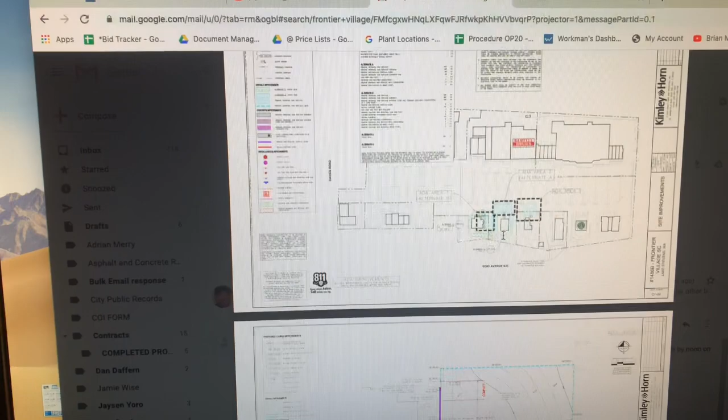Okay, we're looking at a job called Frontier Village Shopping Center, and it's some ADA upgrades on this project. I did a video earlier that was on site showing the locations and what it looks like outside.

Now I'm going to go through the drawings with you. You've got Area 1, Area 2, and Area 3. Area 1 is basically the base bid. Area 2 is called alternate A, and area 3 is called alternate B. So you're gonna have to do separate spreadsheets on this, starting with area 1.

So area 1 is right here. It's a small little company, I can't remember the name of it. It's on the first video.

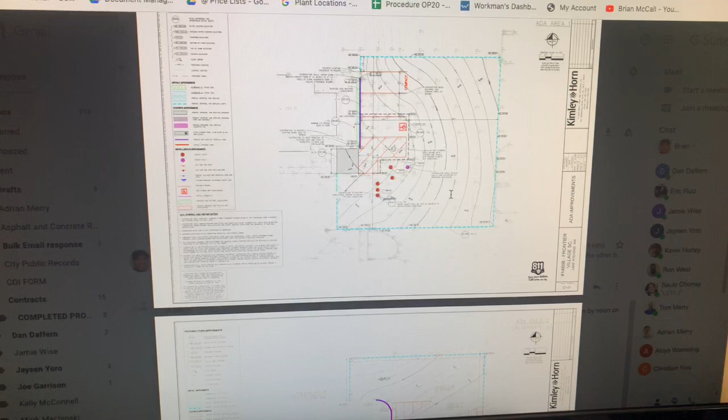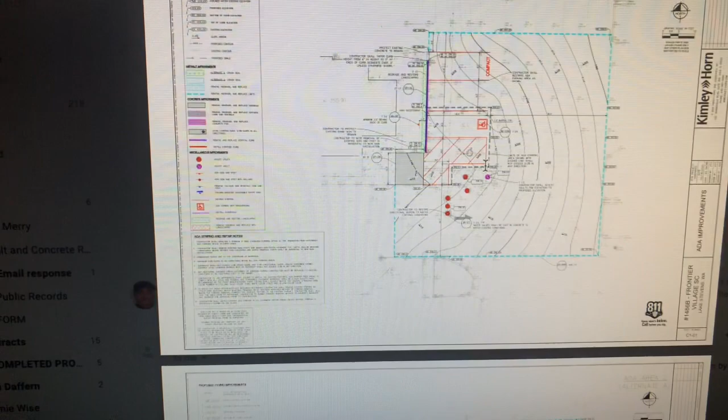What we need to do is remove all this asphalt in this area, and then recreate that area in asphalt. We need to make it ADA compliant, 2% by 2%. We're going to replace that vertical curb, replace that concrete sidewalk, and do some striping. In these little areas where the dots are, the purplish colored one is a vault that we need to adjust when we put the asphalt back in. And then the 5 red things are 6-inch water valves that we just have to put a concrete collar around them, so they're protected by concrete instead of asphalt.

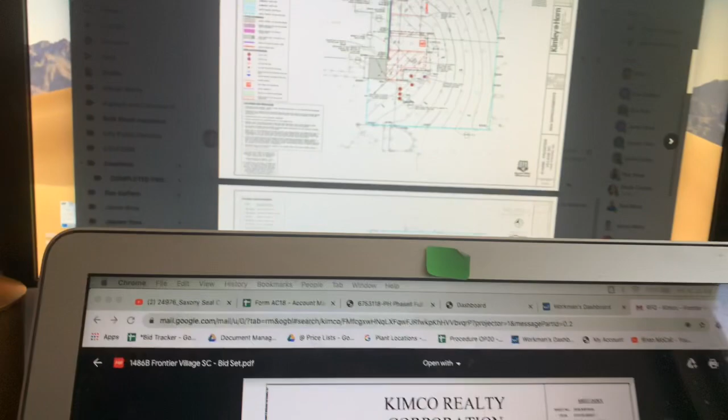Okay, I'm gonna try to blow this up so you can see what I'm talking about a little bit better. There was core samples done out on this property, and around in this area I believe it was 8 inches of asphalt. So I want to propose the asphalt removal and placement at 8 inches. This is in the blue area.

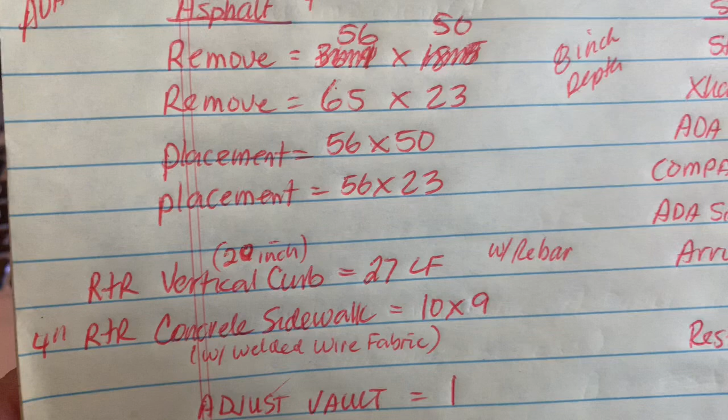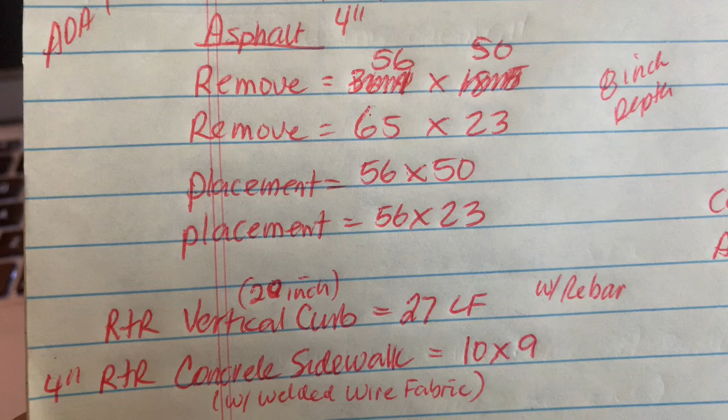So that asphalt removal, I said 4 inches, but that's incorrect, it's 8 inches. We got 56 by 50 and 65 by 23 as our removal. Placement is 56 by 50 and then 56 by 23, so it's a little bit smaller because of the concrete we're putting in.

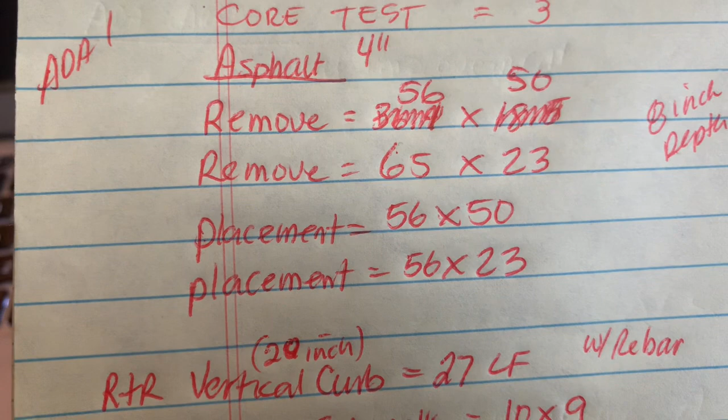Okay, let me see what else. Okay, so that's it on the asphalt.

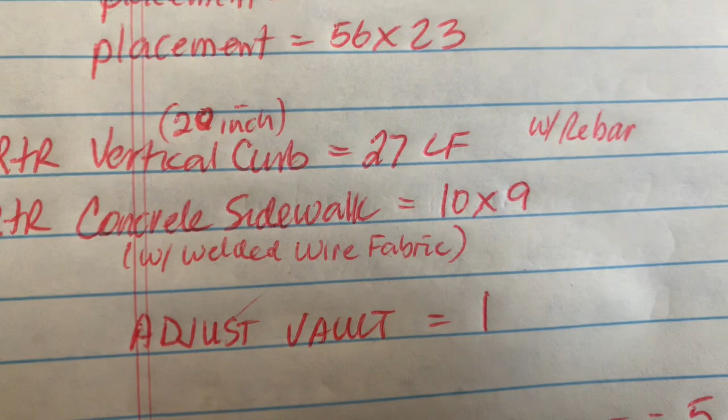Now we're looking at the concrete, which is right here, the concrete pad. That concrete pad's gonna have to be broom finish, it's 4 inches, and we are looking at a 10 by 9. They want welded wire fabric in it.

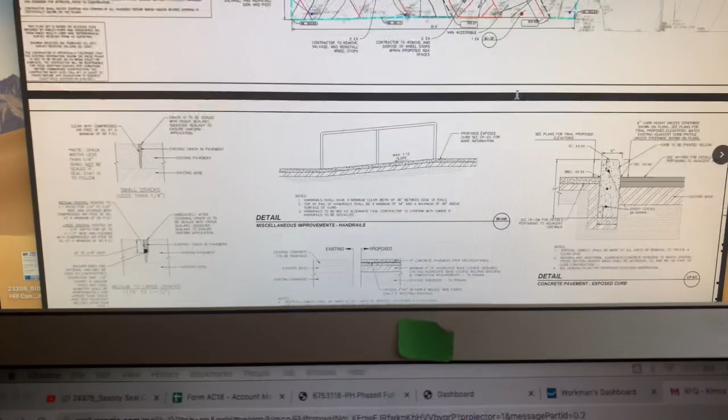Then there's vertical curb, 20-inch vertical curb, 27 feet. That's this purple area, and the detail is in here. Which one is it? It's not that one. It is that one, okay, 20 inches. I don't know what page it's on, but it's in the details. Also on that vertical curb, it's saying we need to put in epoxy coated number 4 rebar throughout the length of that. So we got to have 2 number 4 rebar sticks that are 27 foot each to place inside that vertical curb.

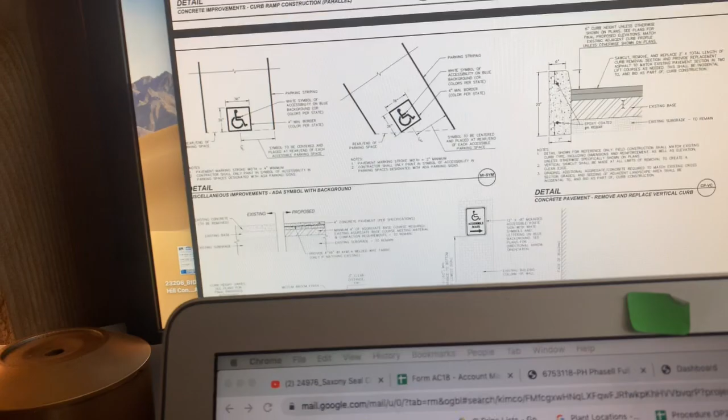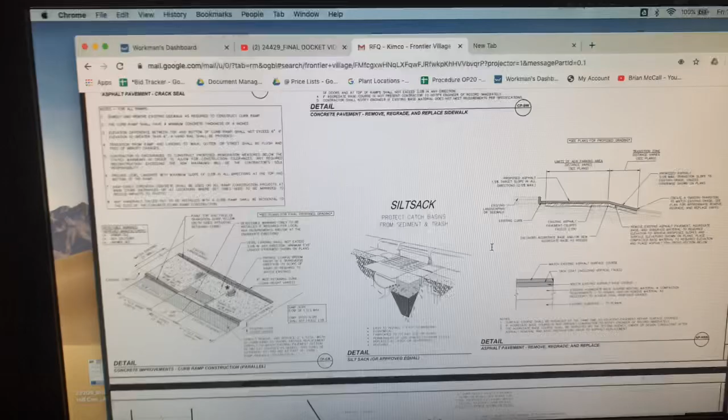Going back to the asphalt, it says we don't have to bring in any extra material. I believe it says existing asphalt pavement slopes exceed that, so there's nothing on the asphalt we need to add in there. But on the concrete, we need to add base to the concrete. So on that sidewalk, we've got 4 inches of concrete, but then we also have 4 inches of aggregate base course underneath. So we're gonna need 4 inches of rock in there and 4 inches of concrete.

Okay, so going back to that pad there on that 10 by 9, we need to assume 4-inch removal of concrete and then 4-inch removal of dirt.

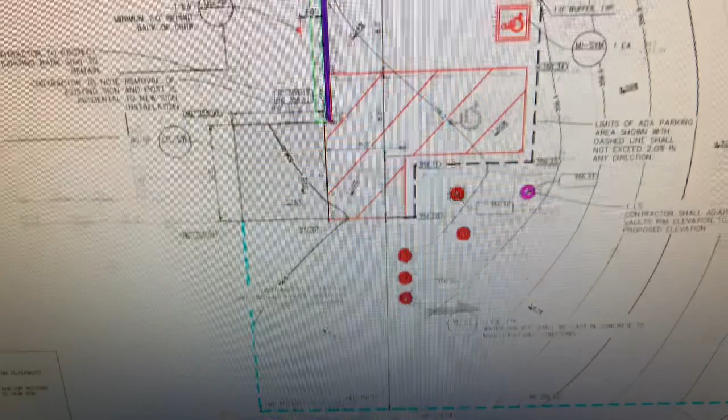Okay, we talked about those valves already. We've got 1 vault lid that needs to be adjusted when we put the asphalt back in. And then we have 5 6-inch water meter valves that need to be cast in concrete around them. They probably could be square if we wanted to make them square, but they want them cast in concrete so that way they're protected.

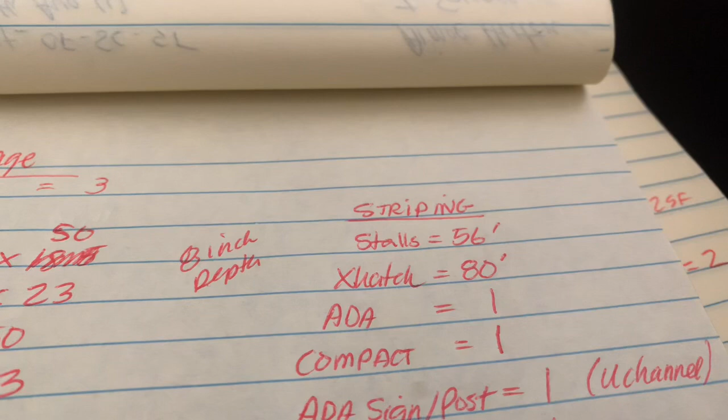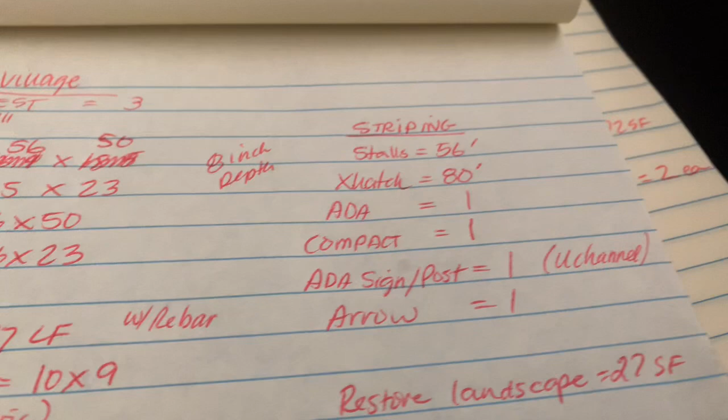Okay, let's go to the striping. There's 56 feet of stall line, 80 feet of crosshatch, one ADA symbol, one 8-inch compact, one ADA sign and post on a U-channel post. So if you plug in the Telespar posts, you'd probably be okay for pricing. And then they want a painted arrow to be put back in.

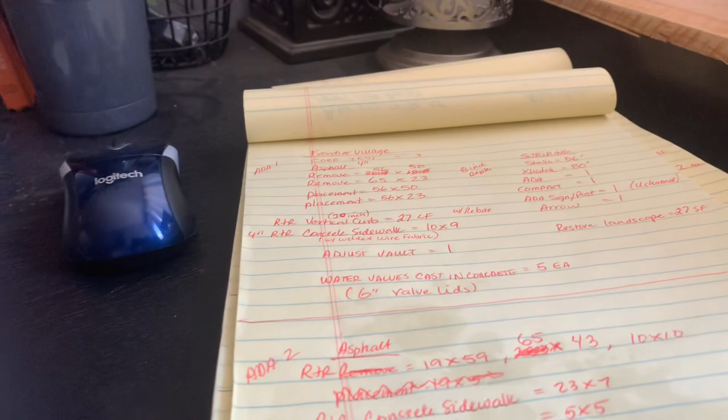Let's see. I think that's everything on this. The first video shows where there's staging available out here. We'll have to close this area down, so we're going to want to make sure that we've got cones and caution tape so that we can block off this area. People will be able to drive around us, but we need to block it off so that way we have access to all that area, that work zone.

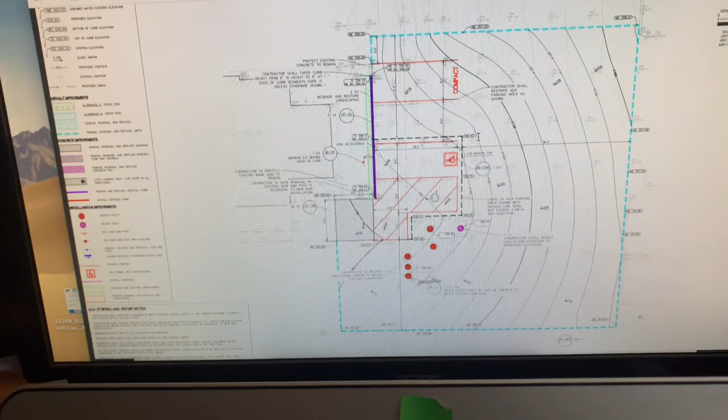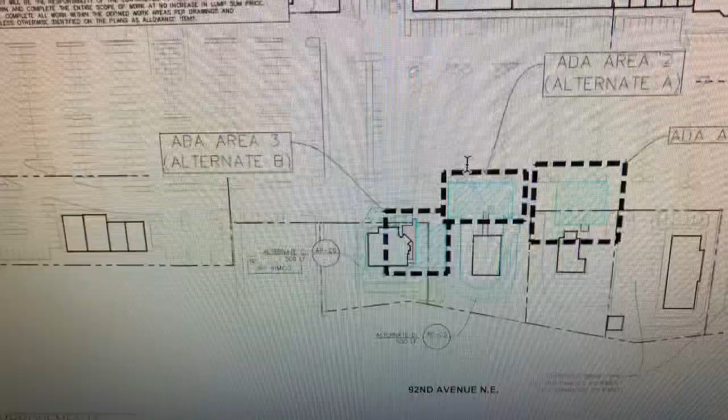And then there's actual parking back here behind the building that we can use too while we're there. All right, so that is area number 1. Let's go to area number 2. Area number 2, if you're looking at this map, you've got right here, and I believe that's Heritage Bank. It has a little drive-through that goes to the back, and then it has ADA upgrades in the front. That area in the back is going to be a bid option, and that is for crack fill. They've got 500 lineal feet of crack fill as a bid option for area number 2.

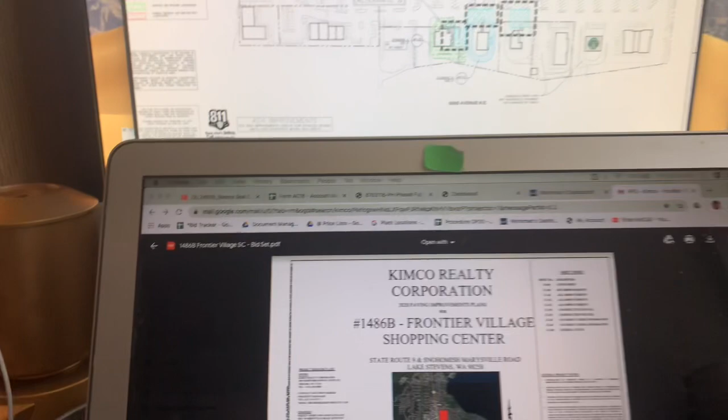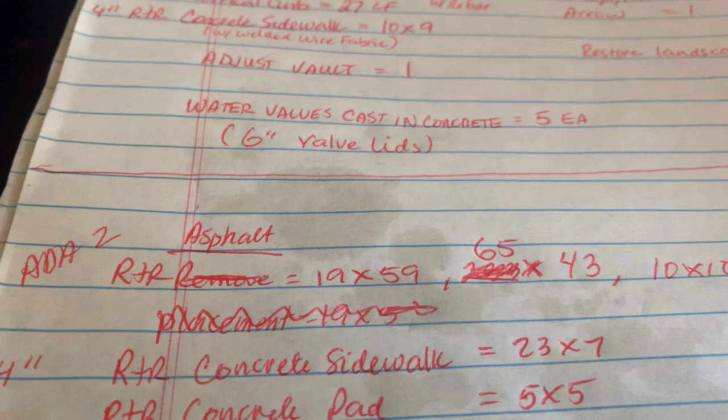Okay. Let's look at how this thing lays out here. So, hold on here. Okay, the blue highlighted area is everything out in the front. We need to remove that asphalt, replace it. We're going to use 8 inches again. And the dimensions on that for the R&R is 19 by 59, 65 by 43, and 10 by 10. I noticed on the drawings they have plugged in square yards, so we can kind of compare my notes with the square yards if we want.

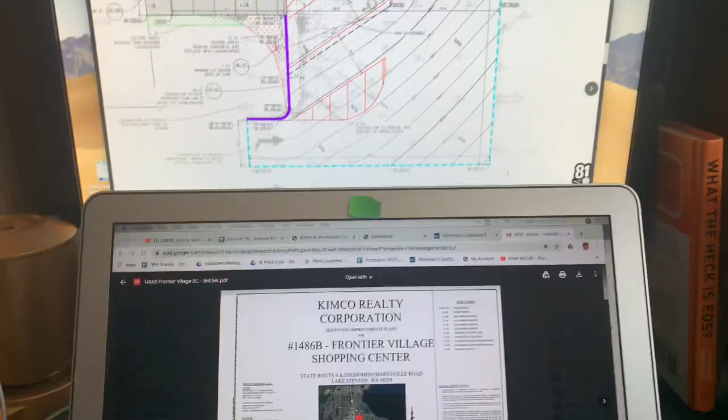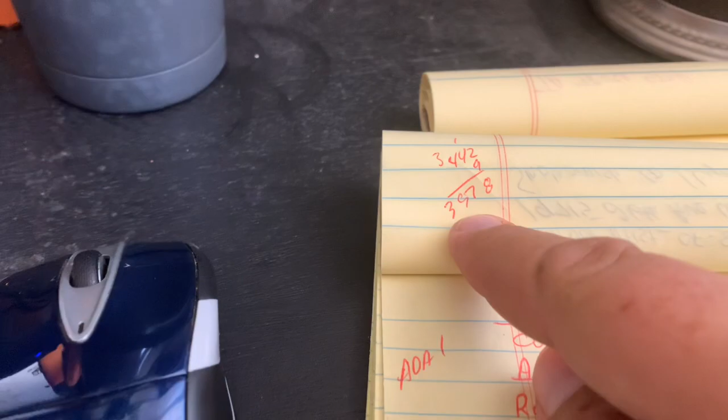Let me see here. Okay, so I gave you my dimensions on area 2 for remove and replacement. They're saying it's 442 square yards, which equals out to 3,978 square feet. So we could compare their footage with what I came up with. Okay, so that's the asphalt portion of it.

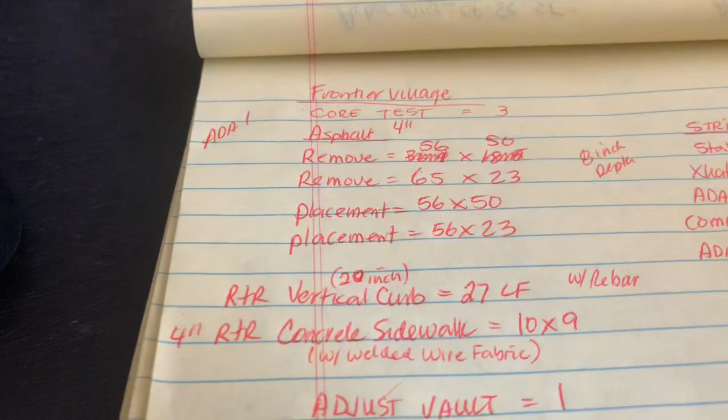Now let's talk about this vertical curb that's in here. That vertical curb, which is 20 inches tall, that is 27 feet long. Oh, I'm sorry, wrong one. The vertical curb is 52 feet long. Okay, 52 feet. That means we have to have the number 4 rebar running horizontally in this curbing. We need 2 sets of rebar running through there. So that's 104 feet of number 4 rebar, epoxy coated.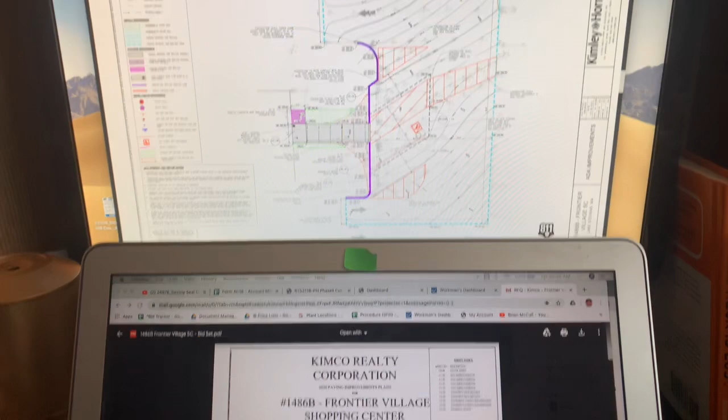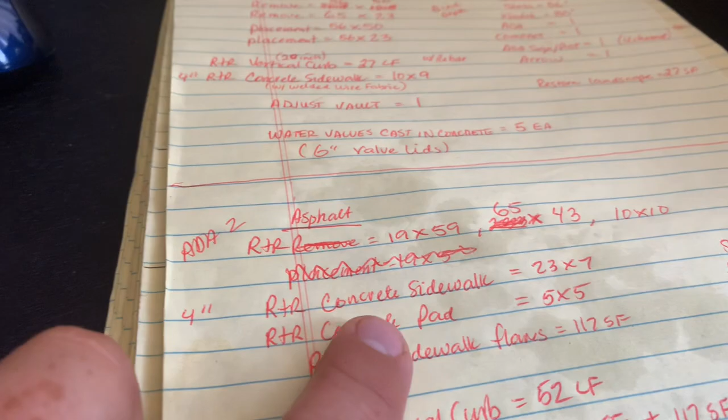Okay, restore the landscaping. There's 100 square feet plus 117 square feet. That's this area in green, and then this area in red. Okay, we'll get back to that. Remove and replace concrete sidewalk, 23 by 7, 4-inch depth. They want that welded fabric inside of it, broom finish. Okay, 23 by 7. Then there's a concrete pad that's right here and right here. Both are also 4 inches.

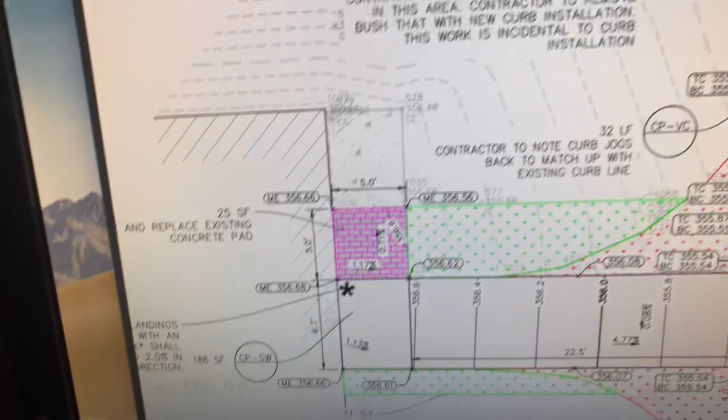Okay. So you've got, hold on. So this is a 7 by 5 here. And then in this area right there, that is a 5 by 5 concrete pad. Okay, you see 25 square feet. All right. So that concrete pad though, we don't have to put the mesh in, I don't believe. We just need it for the other stuff. But you know what? Why don't you just plug it in there? Let's plug in the wire mesh for all of it. So the welded wire fabric for all this concrete through here.

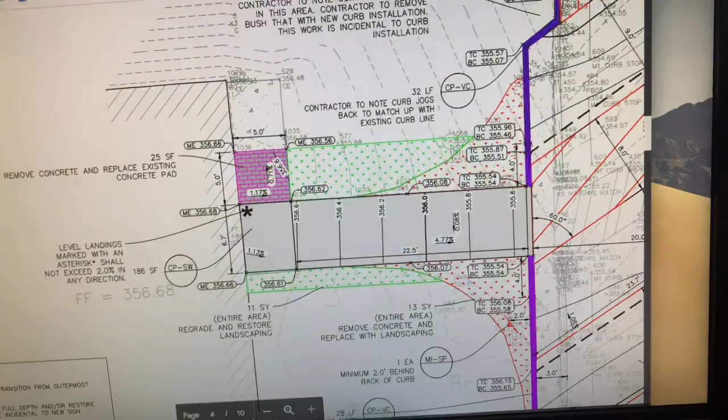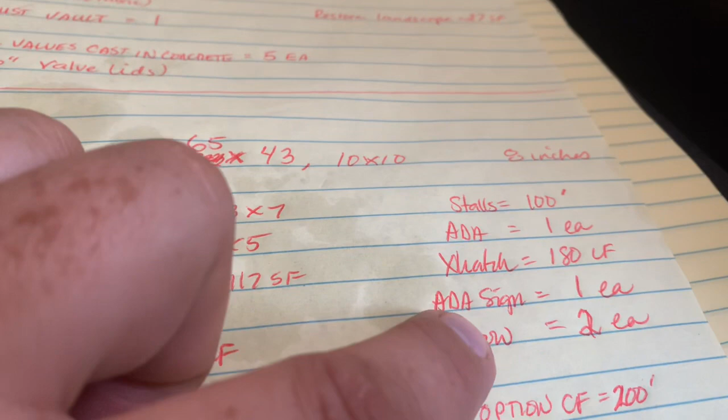Okay, then there's removal of concrete, which is right in here, in this area. That area right there is removal only. That's 117 square feet in that area. Okay, so 117 square feet of concrete removal, 4 inches. All right. Last thing to discuss is the striping and the ADA sign. So we've got 2 arrows, one here, one down here. We've got 100 feet of stall line, 1 ADA, 180 feet of crosshatch, 1 ADA sign and post. That's going to go in the landscaping, and use the Telespar post for pricing.

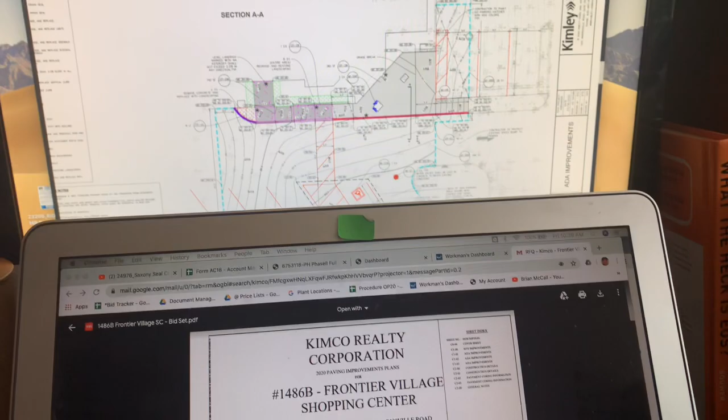I already talked about the arrows, and actually don't look at that crack fill. I said 200 there, but the bid option for the crack fill was 500 feet. Okay, so I think that covers area 2. Okay, so that's on all separate spreadsheets. Now we're looking at area 3.

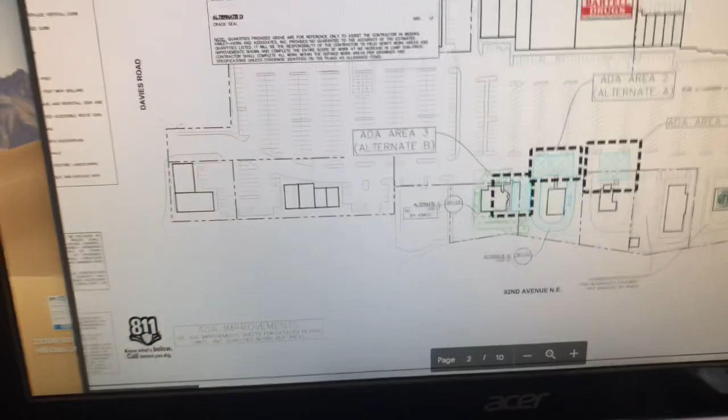So on the map, area 3 is Key Bank. And you can see there's quite a bit of work here. Where that green area is there, it's, I believe, crack fill. Yeah, according to the note legend in green, that's crack seal. So down here, we've got a bid option for 500 feet of crack fill in that area in the green, okay? Now what we're looking at is that blue area for area 3.

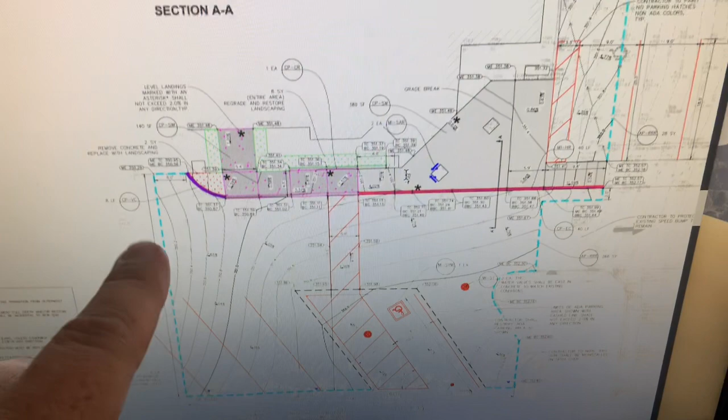Okay, so in this blue area, all of this and all of this along the side, you'll see in my first video, I walked it, but that's all asphalt removal and replacement. This here is not going to be 8 inches. We're going to go with 6 inches on this asphalt here. Okay, so remove and replace that asphalt. We've got 10 by 25 and 61 by 43.

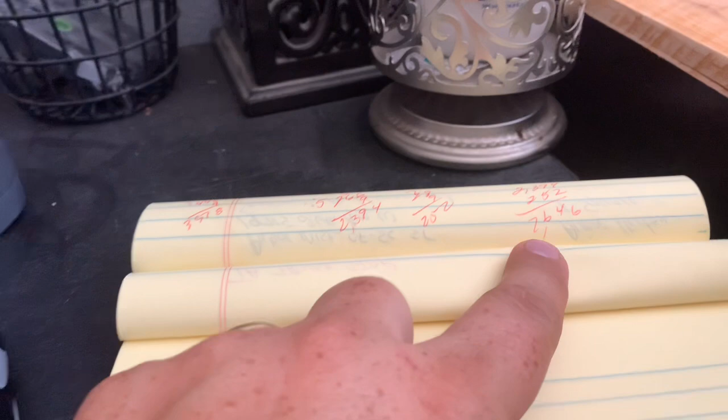If we want to compare notes, okay, so I gave my dimensions on the R&R for the asphalt. If you were to break it down based on what they have on the site plan, it comes out to 2,646 square feet that they have on the drawing. So we'll compare notes, and I want to go with the higher number. I don't want to be short.

Okay, there's two water valves there that we need to cast in place. So we've got to put a concrete collar basically around it to protect the lids. Okay, and I think those can be at 4 inches.

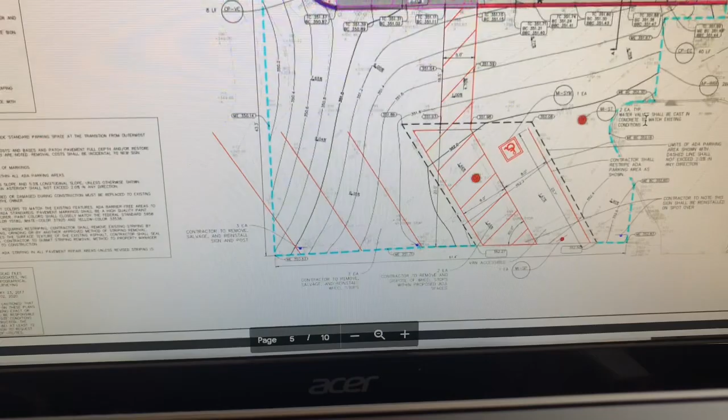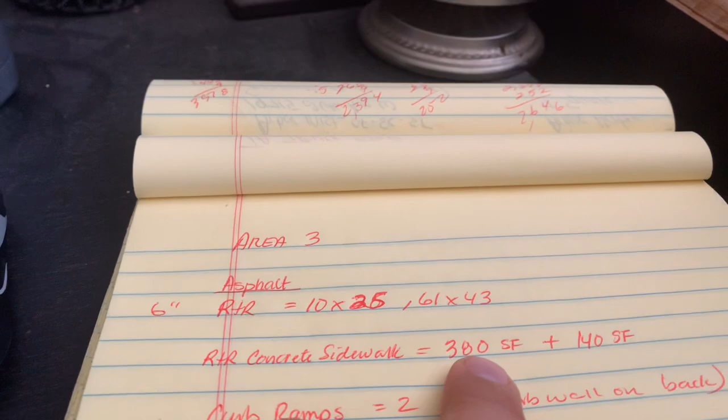We've got concrete sidewalk remove and replace here. 4-inch depth. That's in the gray. Okay. We've got 380 square feet plus 140 square feet. That also includes this purple area right here. Okay. So removing all of that, replacing all of it. You'll see in my first video, this is right up against the building, and it's got a couple posts, got some windows, so we're gonna have to protect those areas.

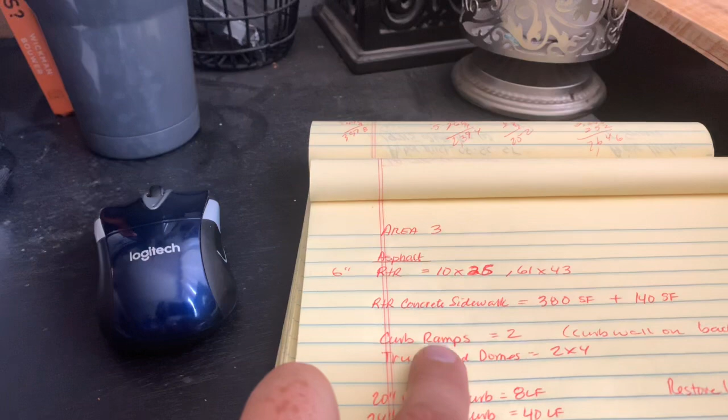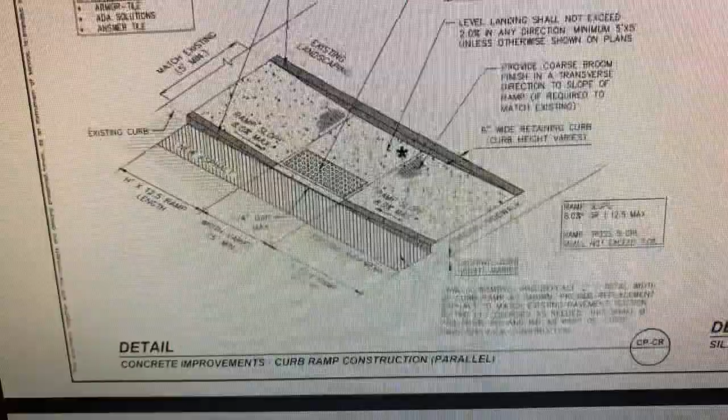Okay, then we're looking at within that sidewalk there's one area where we're gonna have an ADA ramp going in 2 different directions with a truncated dome. That's gonna be right about here in this area. There'll be a landing here and 2 ramps. This is what it looks like. It'll have curbing on the backside. It'll have the integral curb in the front, and then we'll have the sidewalk. It will be poured separately. It's not monolithic, so just giving you a heads up on that.

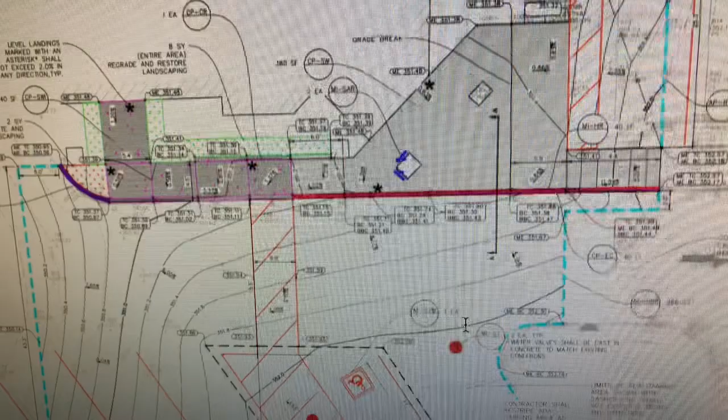Okay, now looking at that reddish purple line, that is curbing, but this is a little thicker curbing. The last stuff I showed you was 20-inch vertical curb. This is 24-inch vertical curb, and there's 40 feet of it. On this detail, it shows that there are 3 sets of rebar in it, epoxy coated number 4 rebar. So there's 3 sets of that. So you've got to go 3 of those times 40 feet. So we've got 120 feet of number 4 epoxy coated rebar for that curb.

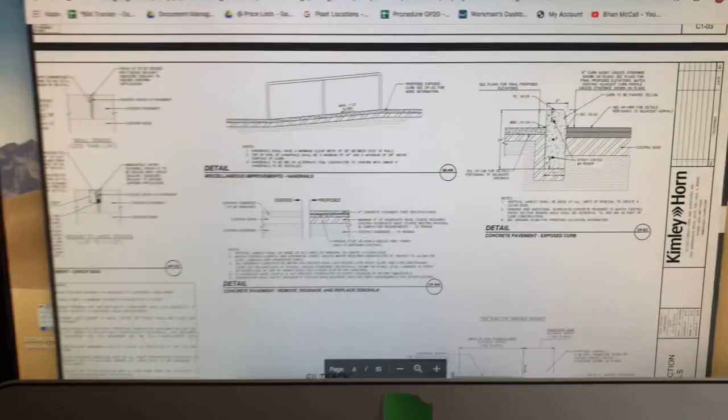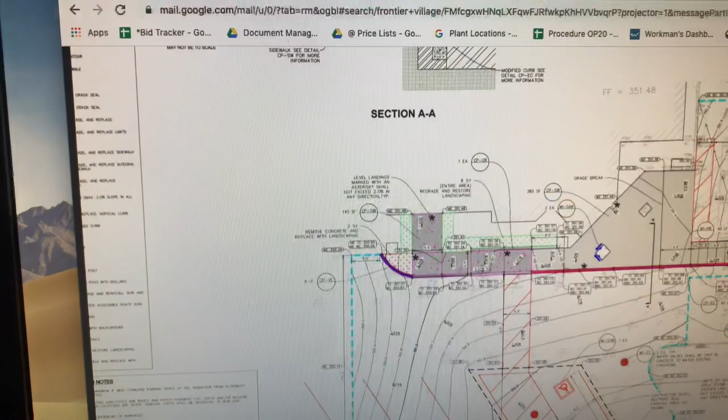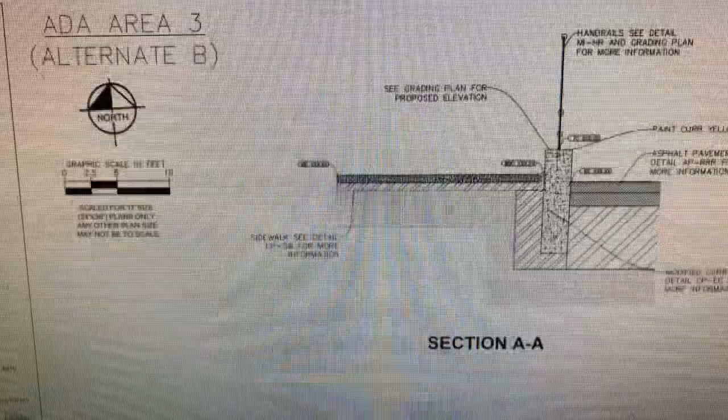And then over here in the purple section, okay, going from basically here to there, we've got 8 lineal feet. Now this area right here, it's going to be a little bit different, but I'll show you the footage here in just a second. So this is what it's looking like here on this curbing. It's basically the 24-inch curb, but it has to be painted yellow because that's where the ramp's going to be. So it's going to have 6 inches exposed on the asphalt side, and then it's going to be a little bit less on the sidewalk side.

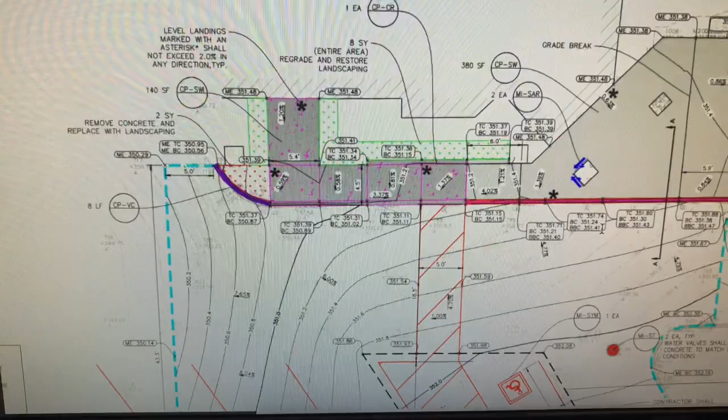So let's just add more 24-inch curbing, and it's gonna go 5 foot plus 5 foot, and then you've got an additional 5 foot, so 15. It's about 22 feet additional there. Okay, so on the 24-inch vertical curb, we now have a total of 62 feet of 24-inch vertical curb, and then we've got that little 8-foot section of 20-inch vertical curb.

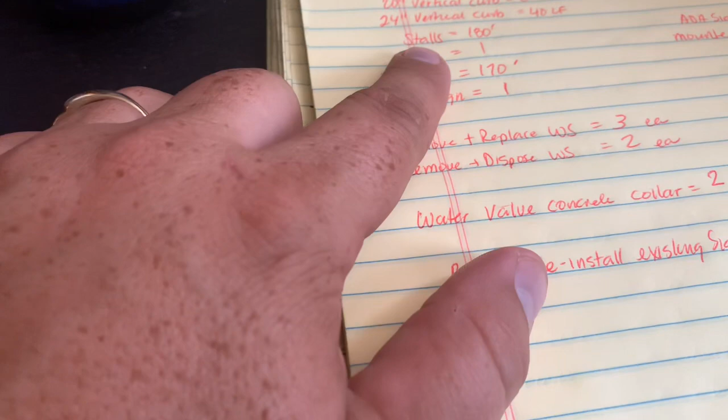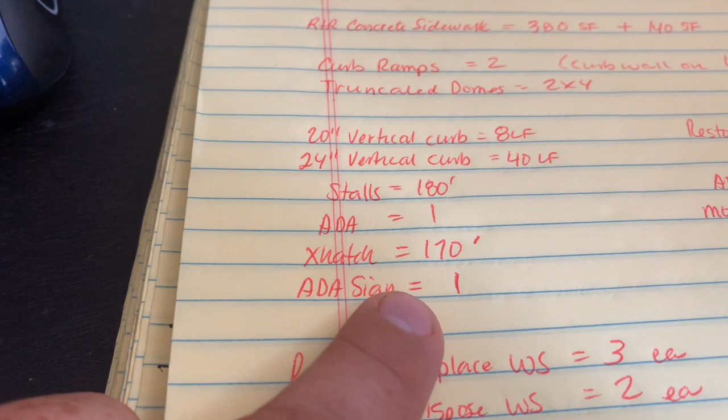All right, let's talk about the striping. 180 feet of stall striping, one ADA symbol, 170 feet of crosshatch, one ADA sign on a post, but it's going to be put in asphalt, so we're going to want to put like a sleeve or something in the ground when we go to do the asphalt, or we're going to have to puncture through the asphalt and put that sign through.

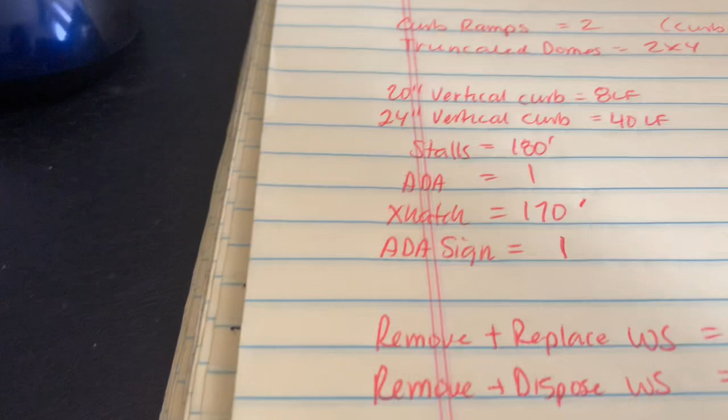Remove and replace wheel stops. There's 3 of them, and those 3 are going to be down here. We'll remove it when we go to do the asphalt work, and then we're going to salvage those wheel stops and reinstall them. Then there's 2 wheel stops that are right here that we need to remove those. Okay, we have to remove those.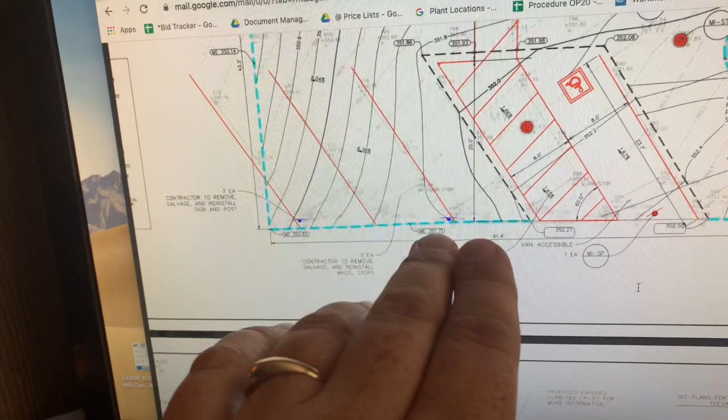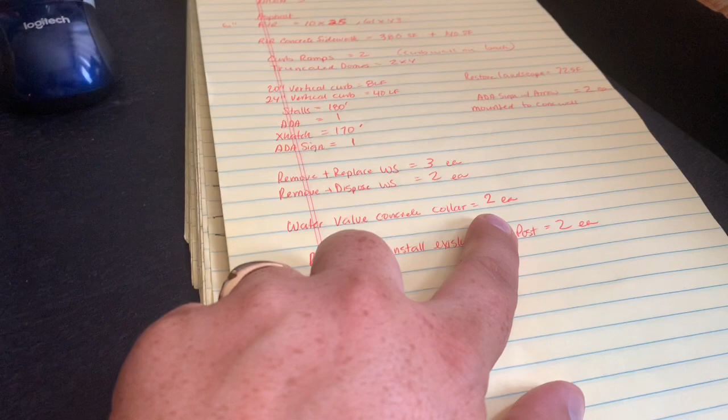There are 2 existing signs and posts here that we need to salvage and reinstall. We talked about the water valves needing the collars. There's 2 of those. Reinstall existing sign and posts. I already talked about that. Restore landscape. There's 72 square feet of landscape to restore.

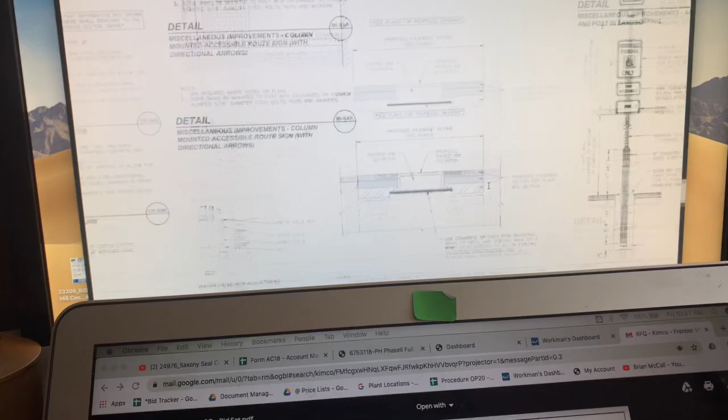And then the last thing is there's 2 ADA signs with arrows that need to be mounted on the concrete wall. And that is right here. So there's a concrete wall there that we need to install those signs onto. And that looks like, I have a picture here. Oh, it's right here. So you can see it's got the ADA sign with a little arrow on it. It's a 12 by 18, and it mounts onto the concrete wall.

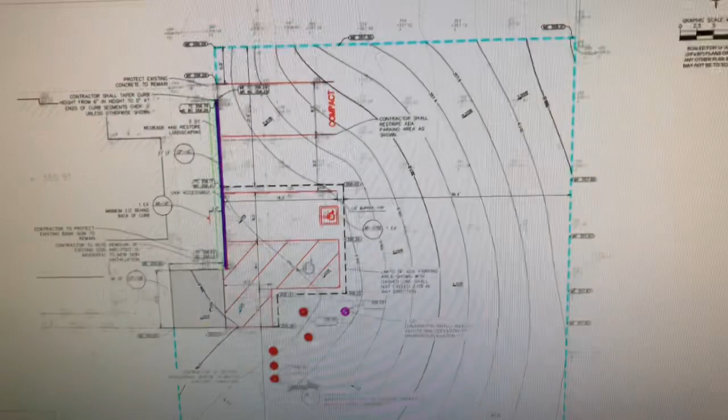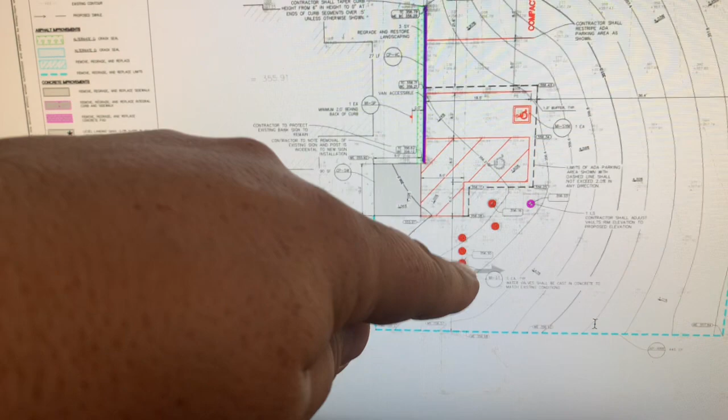So the labor on this, well, with everything on area 1, I'm going to say we're probably looking at 1 day of asphalt. Then we're looking at 1 day of concrete. To do this, we probably can form and pour that vertical curb as well. So I'd probably say day 2 would be concrete. We've also got these little things to pour collars on, a little cast in place around the valves there. I would imagine we can do that as well.

So far I'm up to 2 days, and then probably a 3rd day to go in, do the striping, and put in the signage. Okay, so as I'm looking at it right now, I believe that's going to be 3 days. 3 days on area 1.

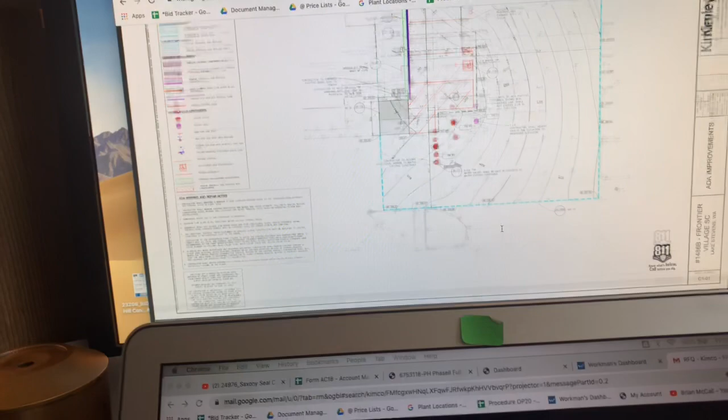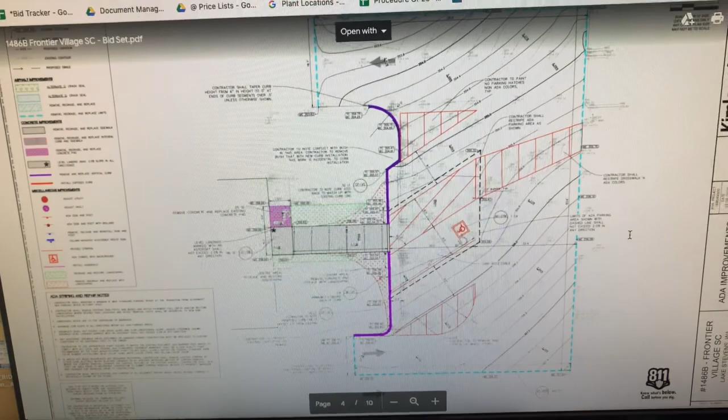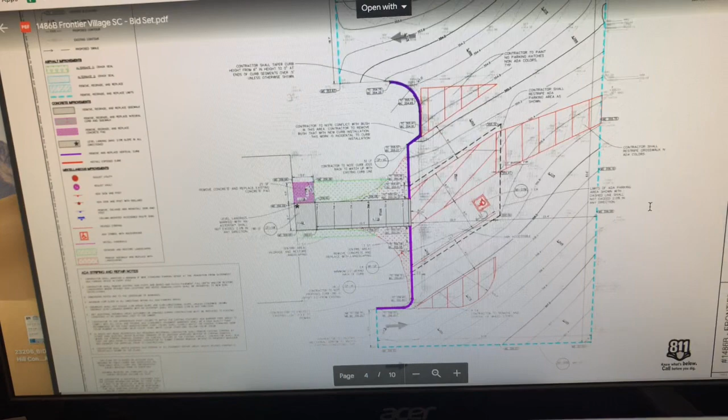On area 2, it's a good sized chunk of asphalt, I'm thinking it's going to be around 178 tons. But I think we'll be able to do that in 1 day, remove it, replace it. Okay, so 1 day for asphalt. I'm going to put 2 days for the concrete because of that curbing that needs to go in, and then removing and replacing that sidewalk. And then 1 day of striping. So a total of 4 days: 1 day for asphalt, 2 days for concrete, and 1 day for striping.

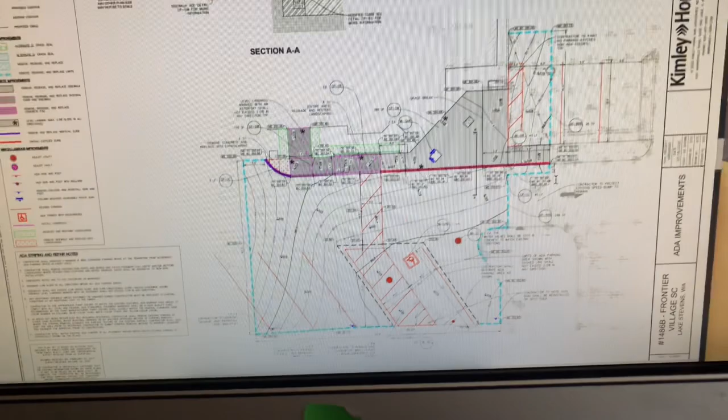Okay, looking into the last part here. And by the way, on area 3, there was a note about handrail, and I'm not putting in price for the handrail. As far as the asphalt goes, we're looking at pretty similar square footages. It might be a little over 200 tons, but I think we can do it. So day 1 would be here and here, I believe. Or maybe that will be 2 days on the asphalt. You'll know from the rules of thumb, but this area is not 8 inches, we're going 6 inches. So there's 1, possibly 2 days on the asphalt.

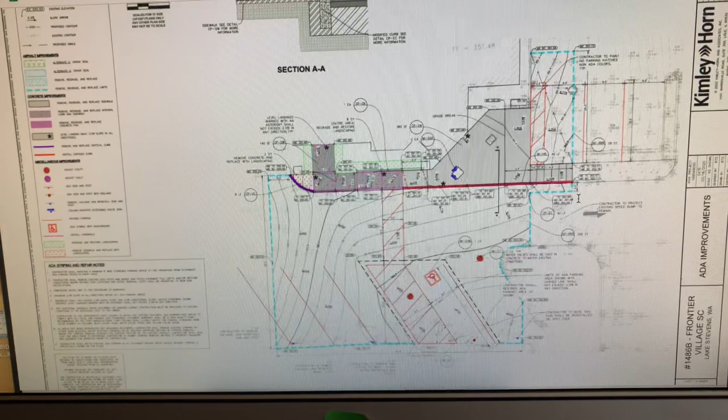On the concrete, we're probably looking at 3 days maybe. Just guessing here, but maybe 3 days just because of all the removal and forming and pouring around the building here and then getting this in, plus the ramp and the curbing. So I'm guessing about 3 days there. And then striping would be 1 day, including putting in the signs and reinstalling the wheel stops.